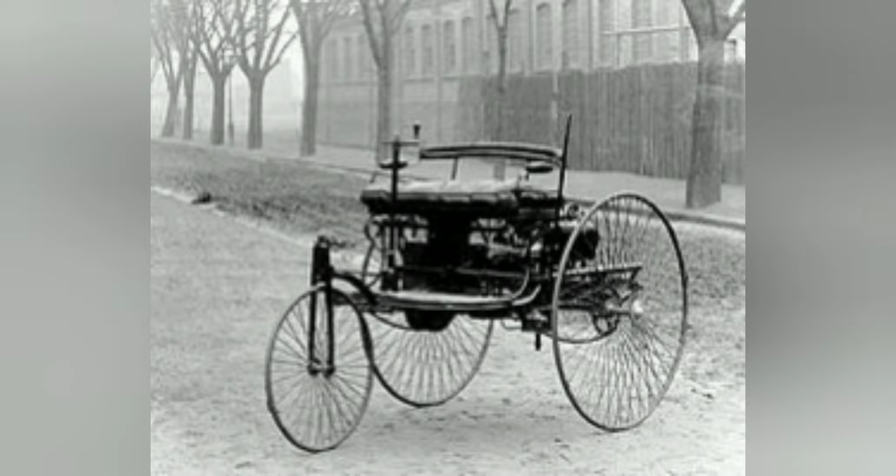Today let us learn about car and its engine. A car or an automobile is a wheeled motor vehicle used for transportation. Most definitions of cars say that they run primarily on roads, seat 1 to 8 people, have 4 wheels, and mainly transport people rather than goods. Cars came into global use during the 20th century, and developed economies depend on them.

The year 1886 is regarded as the birth year of the modern car, when German inventor Carl Benz patented his Benz Patent Motor Wagon. Cars became widely available in the early 20th century. One of the first cars accessible to the masses was the 1908 Model T, an American car manufactured by the Ford Motor Company. Cars were rapidly adopted in the US, where they replaced animal drawn carriages and carts, but took much longer to be accepted in Western Europe and other parts of the world.

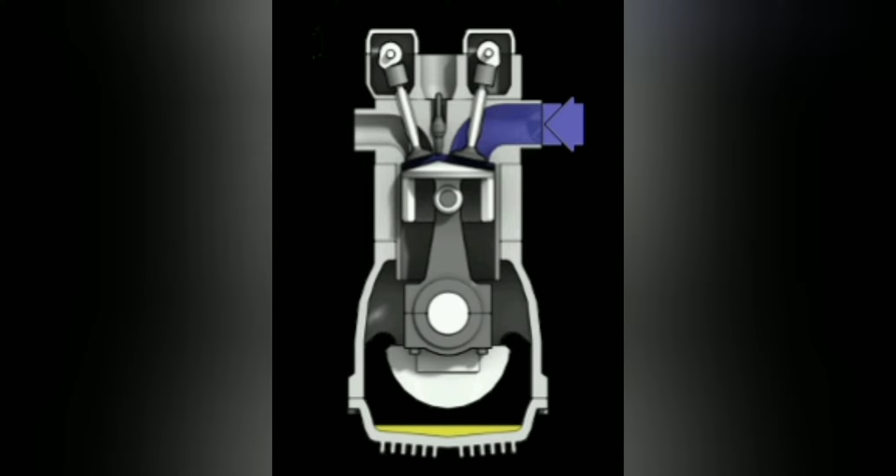An engine or motor is a machine designed to convert one form of energy into mechanical energy. Heat engines convert heat into work via various thermodynamic processes. The internal combustion engine is perhaps the most common example of a heat engine, and it is also used in automobiles, in which heat from the combustion of a fuel causes rapid pressurization of the gaseous combustion products in the combustion chamber, causing them to expand and drive a piston, which turns a crankshaft.

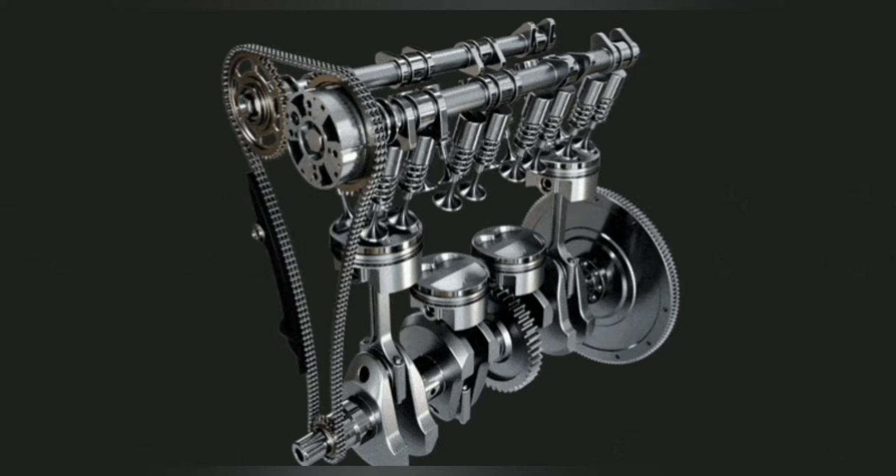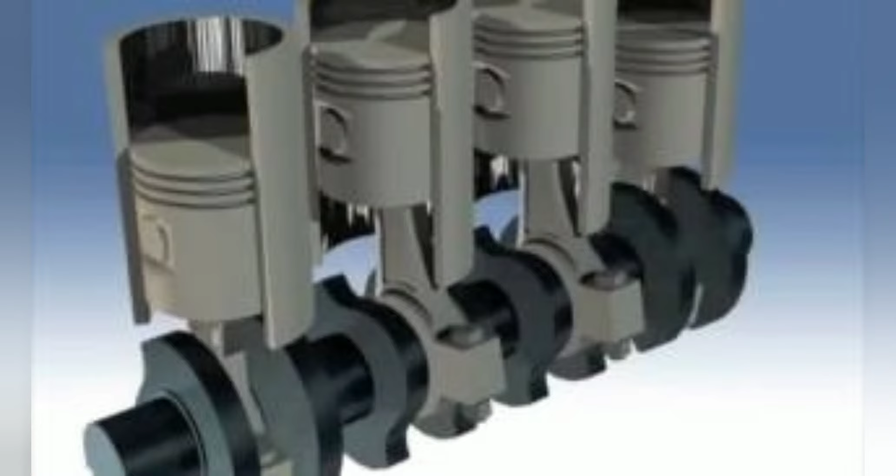Electric motors convert electrical energy into mechanical motion. As of 2013, there were a wide range of propulsion systems available or potentially available for automobiles and other vehicles. Options included internal combustion engines fueled by petrol, diesel, propane, or natural gas, hybrid vehicles, plug in hybrids, fuel cell vehicles fueled by hydrogen, and all electric cars.

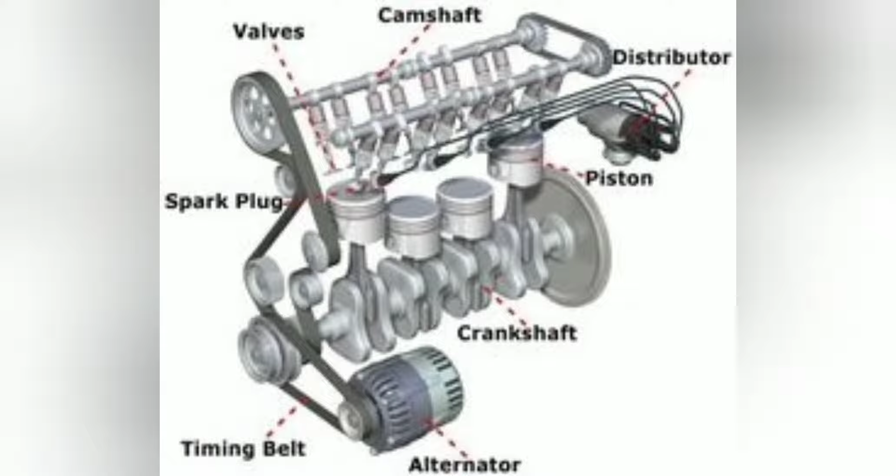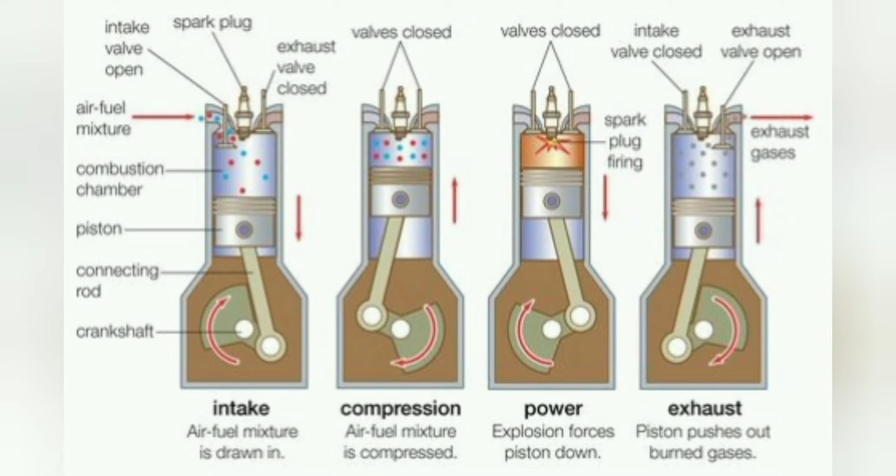Fueled vehicles seem to have the advantage due to the limited range and high cost of batteries. Some options require construction of a network of fueling or charging stations. With no compelling advantage for any particular option, car makers pursued parallel development tracks using a variety of options. Reducing the weight of vehicles was one strategy being employed.

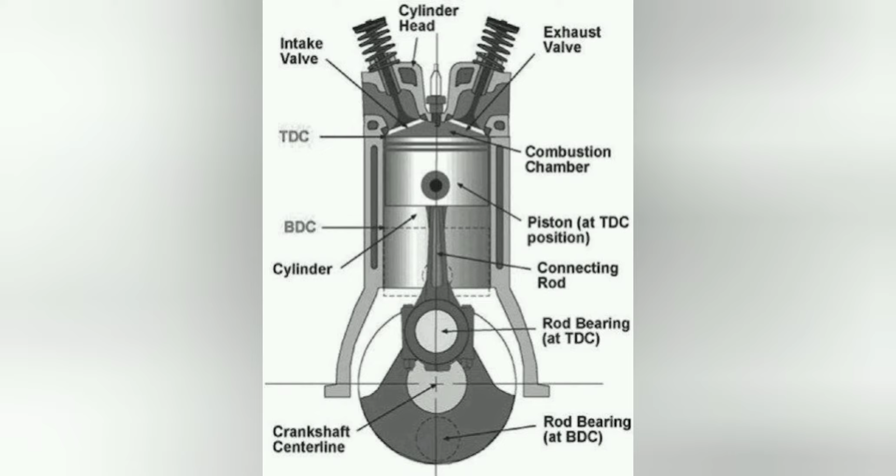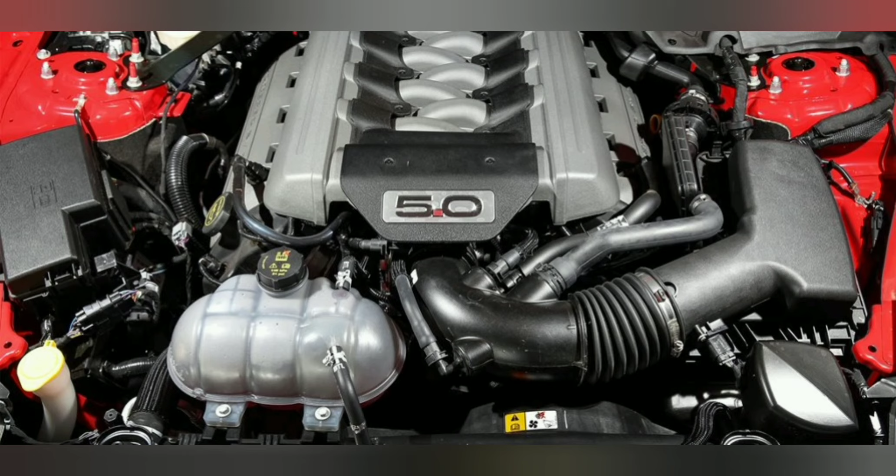An alternative fuel vehicle is a motor vehicle that runs on alternative fuel and energy other than traditional petroleum fuels like petrol or diesel fuel, and also refers to any technology of powering an engine that does not involve solely petroleum. Examples: electric car, hybrid electric vehicles, and solar powered vehicles.

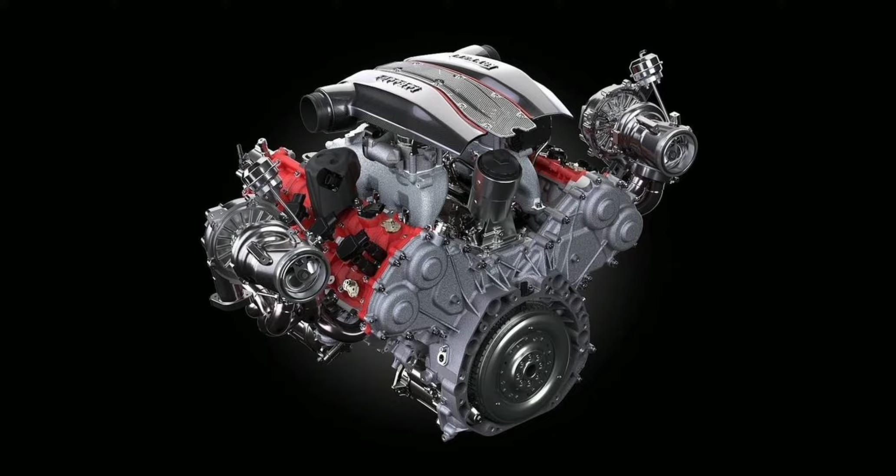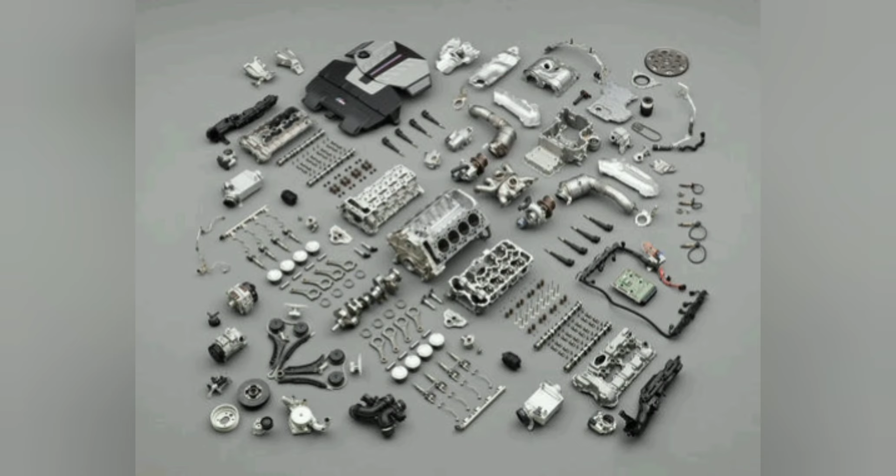Because of a combination of factors such as environmental concerns, high oil prices, and the potential for peak oil, development of cleaner alternative fuels and advanced power systems for vehicles has become a high priority for many governments and vehicle manufacturers around the world.

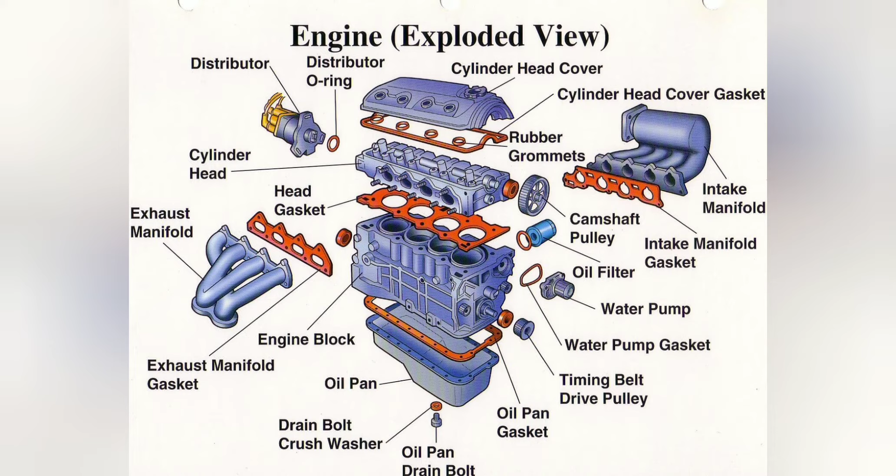An internal combustion engine (ICE) is a heat engine in which the combustion of a fuel occurs with an oxidizer, usually air, in a combustion chamber that is an integral part of the working fluid flow circuit. In an internal combustion engine, the expansion of the high temperature and high pressure gases produced by combustion applies direct force to some component of the engine.

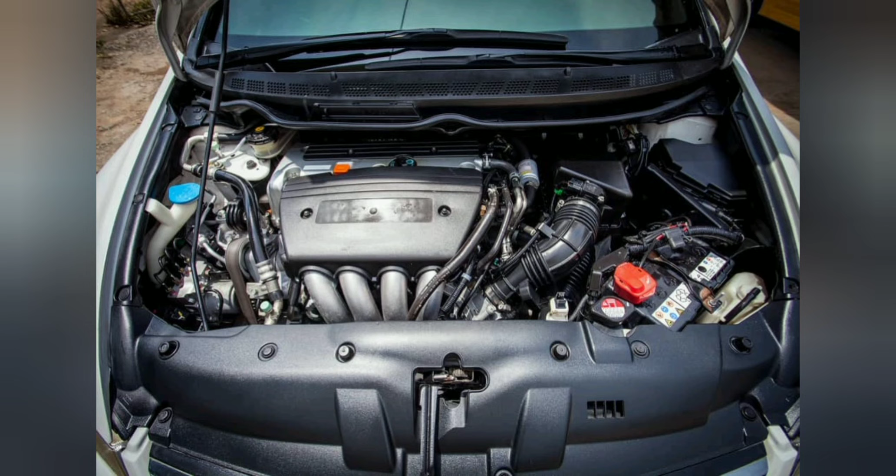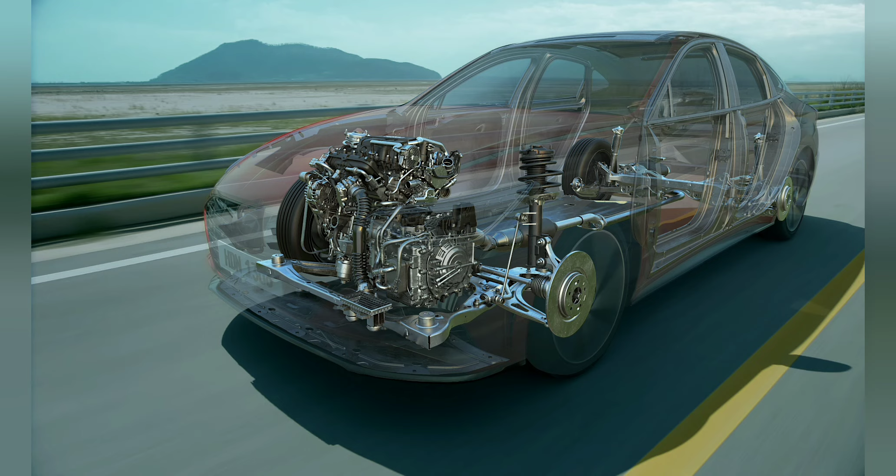The force is applied typically to pistons, turbine blades, a rotor, or a nozzle. This force moves the component over a distance, transforming chemical energy into useful work. This replaced the external combustion engine for applications where weight or size of the engine is important.

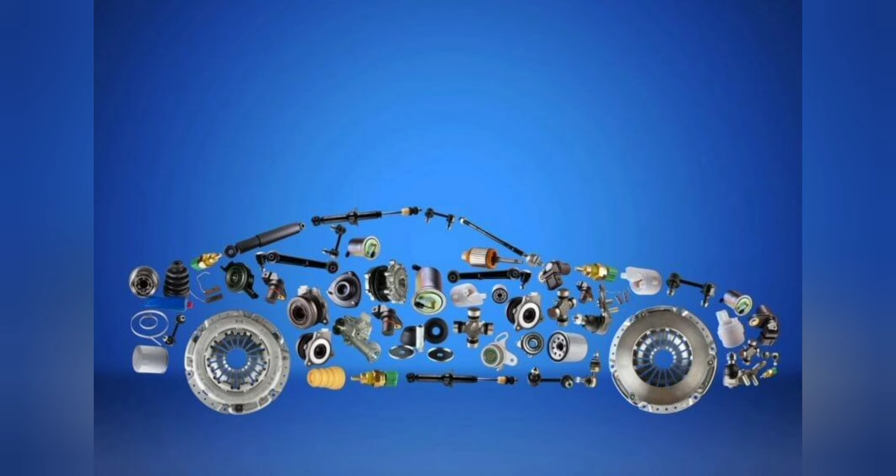The first commercially successful internal combustion engine was created by Etienne Lenoir around 1860, and the first modern internal combustion engine was created in 1876 by Nicolas Otto.

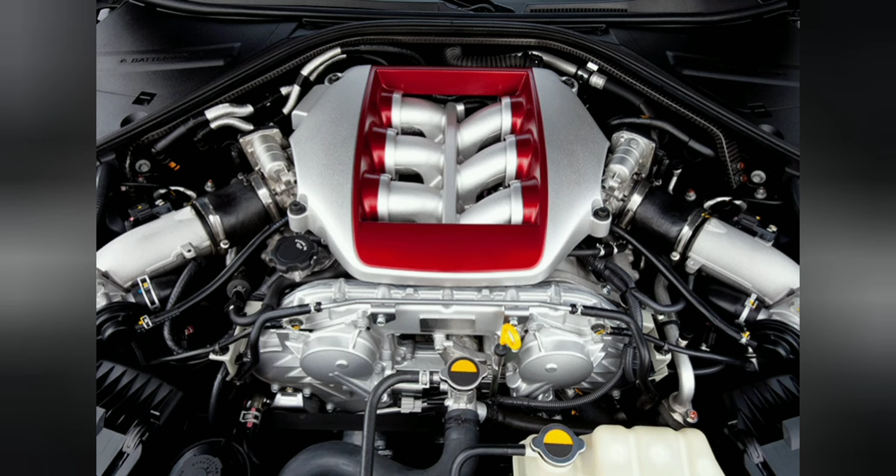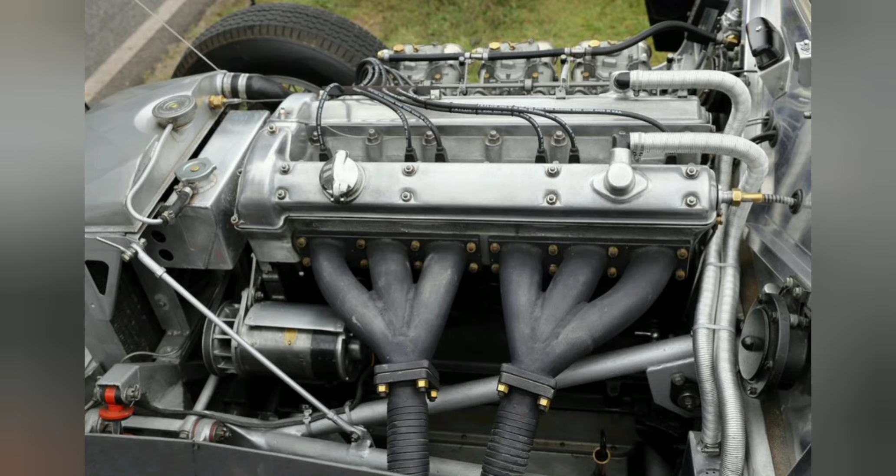The term internal combustion engine usually refers to an engine in which combustion is intermittent, such as the more familiar four-stroke and two-stroke piston engines, along with variants such as the 6-stroke piston engine and Wankel rotary engine.

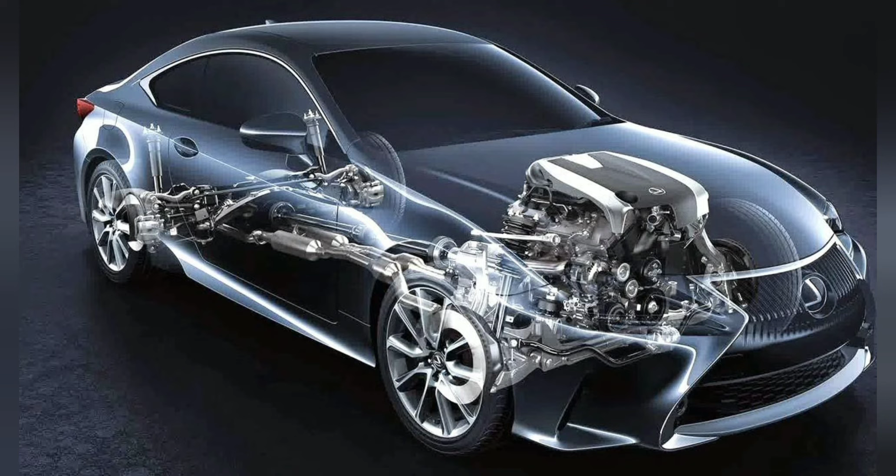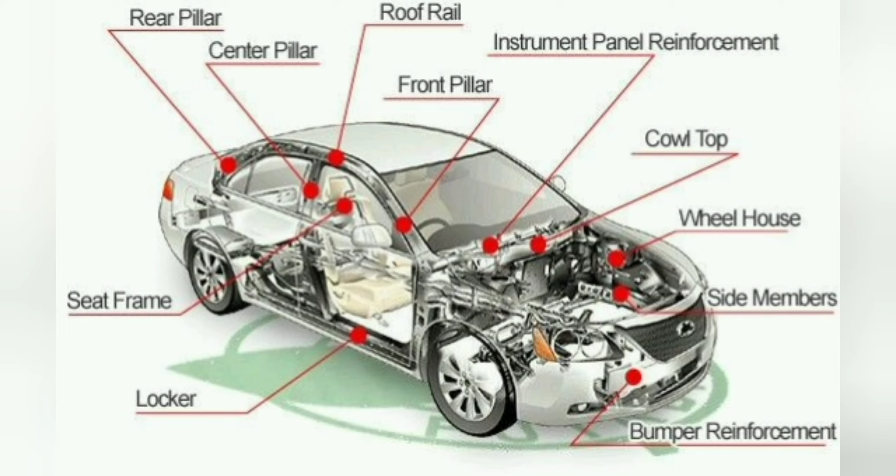A second class of internal combustion engines use continuous combustion: gas turbines, jet engines, and most rocket engines, each of which are internal combustion engines based on the same principle as previously described. Firearms are also used as a form of internal combustion engine, though they are a type so specialized that they are commonly treated as a separate category.

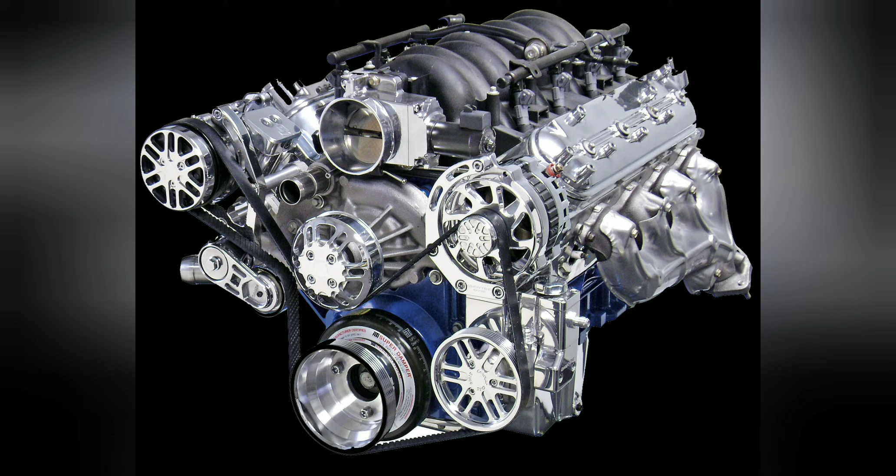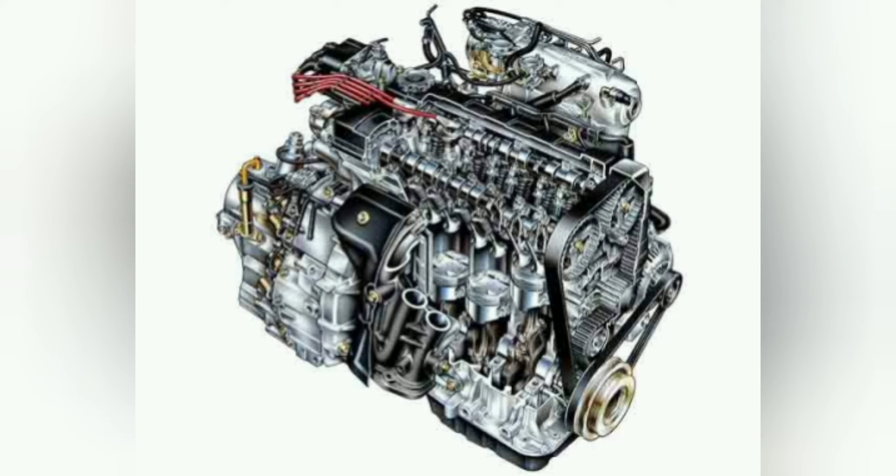ICEs are usually powered by energy dense fuels such as gasoline or diesel fuel, or liquids derived from fossil fuels. While there are many stationary applications, most ICEs are used in mobile applications and are the dominant power supply for vehicles such as cars, aircraft, and boats.

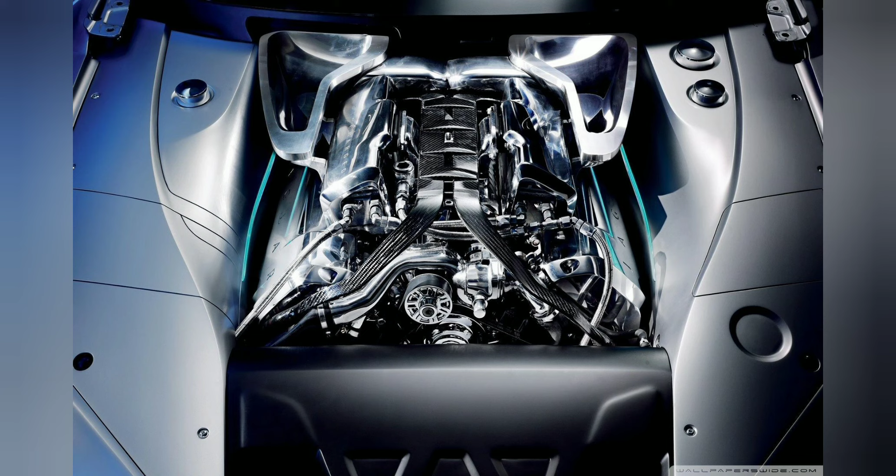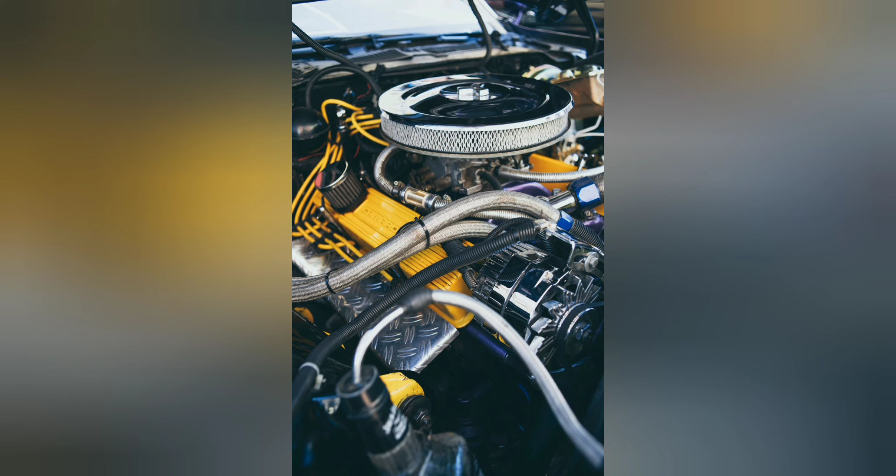In contrast, in external combustion engines, such as steam or Stirling engines, energy is delivered to a working fluid not consisting of or mixed with or contaminated by combustion products. Working fluids for external combustion engines include air, hot water, pressurized water, or even liquid sodium heated in a boiler.